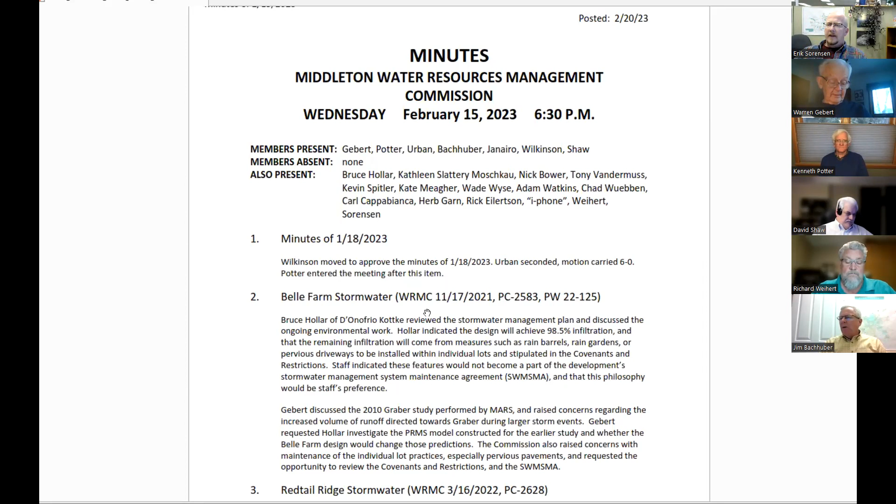So the first item of business then is a Middleton manure digester. Is that correct? It's called Middleton? Okay. Anyway. Yeah. You want to introduce it, Erik? I will. I think in January, the commission had asked for some more information about this digester. So I contacted Kyle Minks with Dane County Land and Water Resources. And he is here to make a presentation tailored just for us. Oh, great.

I did mistakenly say this is located in the town of Middleton. It's really the town of Springfield, I believe. Yep. Other than that, I think. Yeah, you're correct in that, Eric. We just refer to it as our Middleton digester when people are always asking, because it's the closest reference point for people around the state.

Do you want me to use the PDF version that I sent you, Eric, or is it easier for me to share my screen in the PowerPoint? It's up to you. If you want to share, you can, or I can flip slides for you. I'll share my screen if you're okay with that. No, I can get you in. Okay. I'm just slow. I know I sent you this presentation last week, and I say it's the newest and greatest because we just got the updated 2022 numbers for the digester. So I thought you all might be interested in that. You'll be the first to see it.

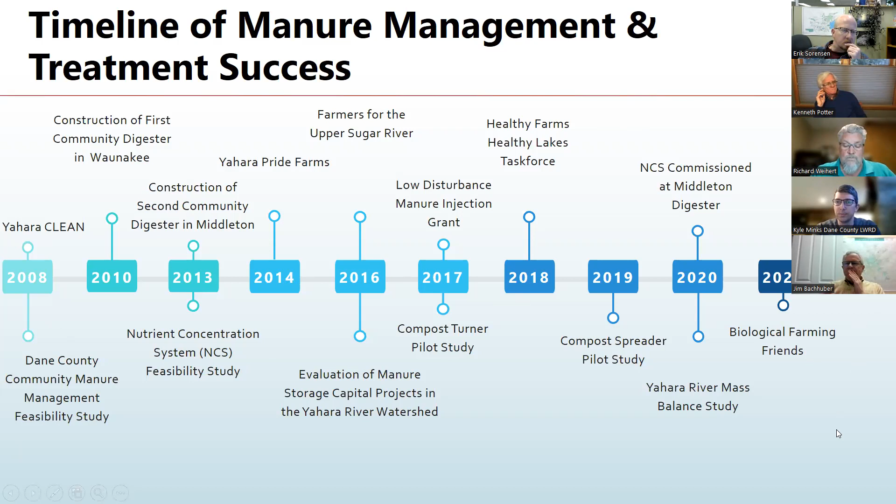So one thing that I want to point out at the beginning of the conversation, and most of you are probably aware of this, but there's a common misconception that anaerobic digesters remove phosphorus. The digesters themselves don't do anything for phosphorus, right? The principle of a digester is to collect either animal waste or food waste, put them in an anaerobic condition to generate methane or gas, in which case that gas could be captured and reused.

In addition, the solids that come out, or the digestate, the material that's left over from the gas generation, go through further processing through screw presses and filtration systems to really separate the nutrients out into different components. I'll talk a little bit more specifically about the Middleton site in a future slide. But I just want to lay the foundation that a lot of people, when they think digester, they think the digester removes phosphorus. And really it's all of these components at the facility that get us to that phosphorus removal and that water quality component that the county's interested in.

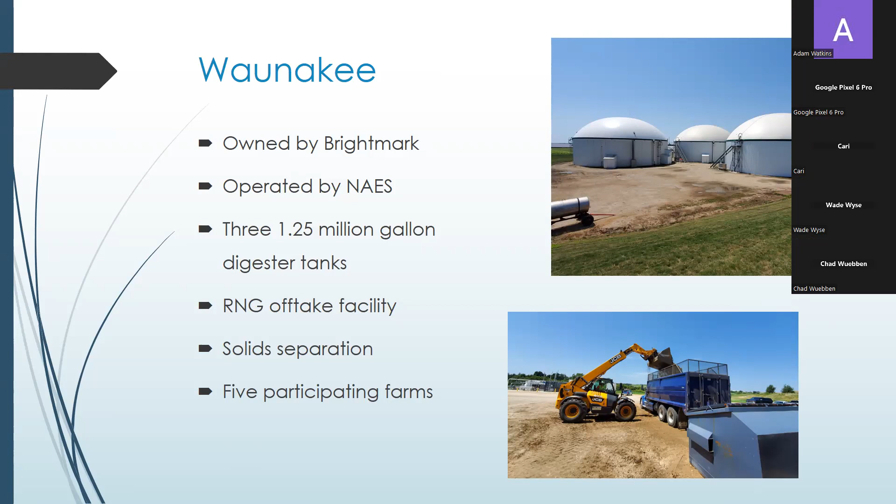And then they also have what we call an RNG offtake facility, which stands for renewable natural gas. That's basically the collection system on site that collects the gas from those 3 digester tanks, cleans it, and then compresses it to be transported on a semi-trailer to our landfill facility. They also have a solid separation system at this facility in which solids are removed that contain a majority of the phosphorus.

And currently we've got 5 participating farms in this facility. Originally, when the digester was built back in 2010, there were 3 participants. And in probably the past 2 years, they picked up 2 additional participants. This facility right now is pretty much at capacity. They don't have much, if any, more space to take on more manure.

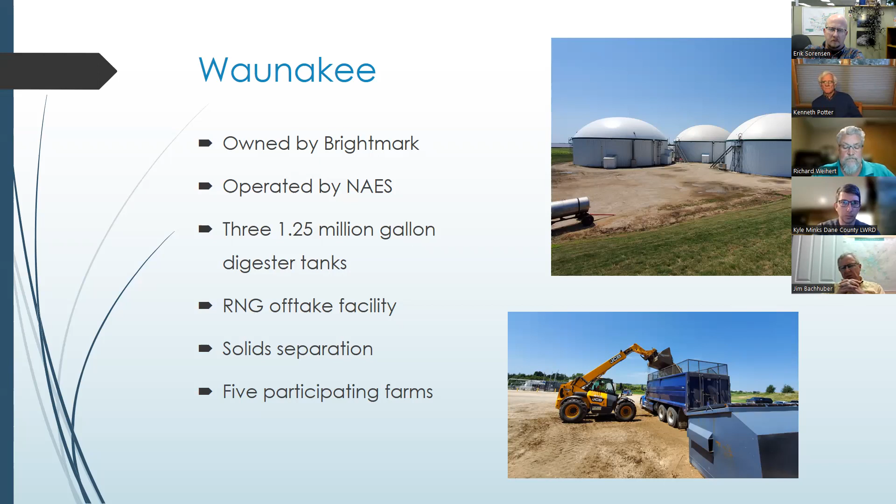They have similar solid separation equipment, in that they have a screw press and a centrifuge that is used to remove the solids from the manure. And then they also have 5 participating farms at this point, and are pretty much at capacity as well in their ability to add more manure.

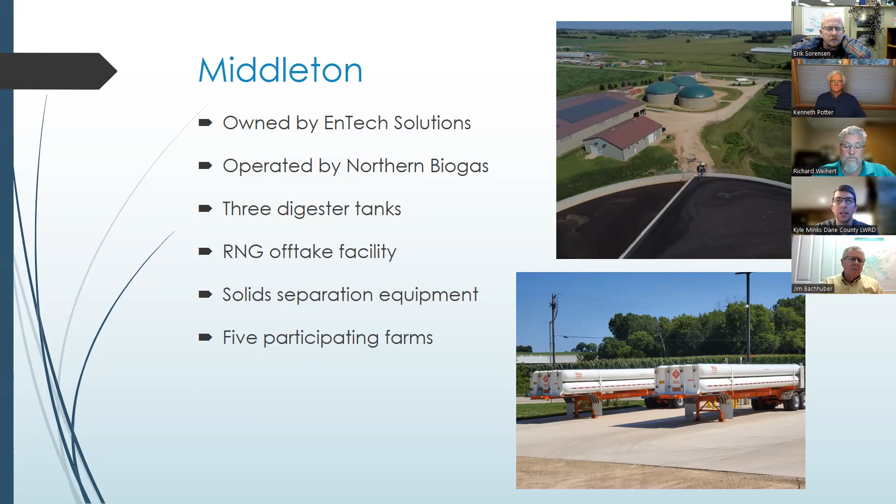What's kind of unique about the Middleton facility, in addition to what I listed on that slide, is it has these other add-on features that we learned in the first go around or wanted to try to see how that might improve operations. And that includes a 71,000 square foot solids building that you see on the right for the solids to help in the facilitation and composting. There's a compost turner in there that allows them to add other soil amendments or other nutrients and aid in that composting process. In addition to that, it also has a 15 million gallon storage lagoon on site for the storage of the centrate and the digestate that comes out of the digester.

Additional improvements that have happened within the past year and a half is that there's a complete solar microgrid out there, which is pretty unique, and we were very excited to see EnTech embark on. In essence, they are 100% carbon neutral. They put a solar grid on the back end of the meter, so that way they can generate from the solar panels all the energy they need on site. So if you drive by there, you'll see solar arrays on the sides of the hills, on top of the buildings, to generate the power needs for the equipment there.

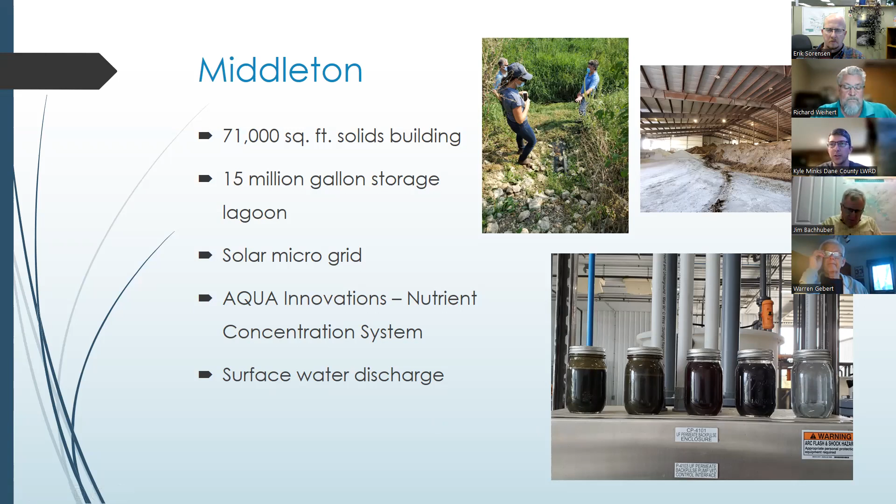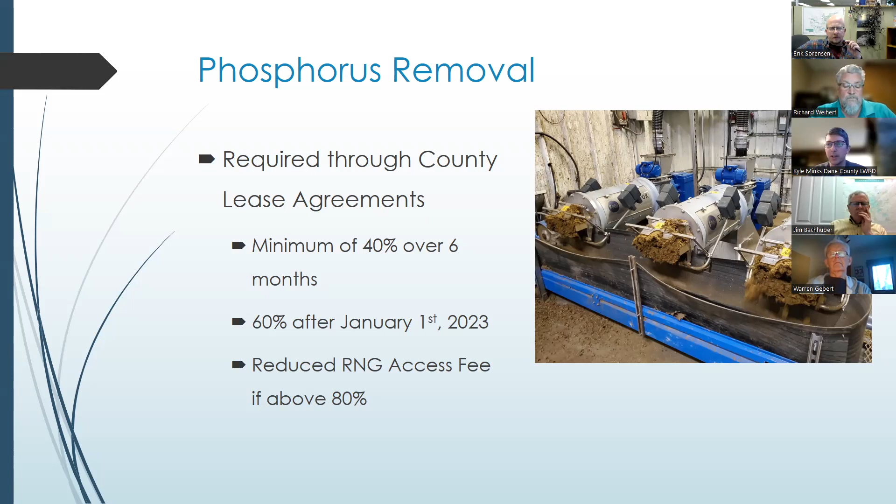In addition to that, we also built into some of the RNG agreements an incentive. We wanted to give them a reward for trying to remove more than 80% of the phosphorus that comes in. And so we've got in our agreements the ability to reduce, in essence, a tipping fee or a service fee that we charge for them to offtake their RNG that they generate and bring to our landfill if they're able to remove more than 80% of the phosphorus that comes in.

And then along with that, that's kind of the performance that we have for each of the different digester facilities. We also have built into our lease agreements the requirement for any participating farm to apply the centrate or the liquids that are remaining and even some of the solids according to an NRCS nutrient management plan on all the project fields. So the 5 farms that we have on both sites are abiding by these land spreading requirements.

What that in essence means is that the digester nutrients and manure applied is based on a soil test phosphorus and crop uptake needs with more restrictions than what the current 590 standard has. So really these farms are required to go to a higher level of performance than what the state performance standards require of them. And the goal of that is to try to draw down those phosphorus levels that are in the soil out there that these participating farms have.

We know that this part of the watershed has a lot of history of livestock agriculture, a lot of history of manure applications, and in essence, a legacy buildup of phosphorus exists on a lot of the soils that are out there. And so the farms that are participating in these projects, we're trying to get those to be reduced. And then again, all fields need to still meet that PI of 6 or less. And in addition to that, all the farms that are participating in the project are not allowed to apply manure or any of the digester materials on snow or frozen ground. That's an additional restriction.

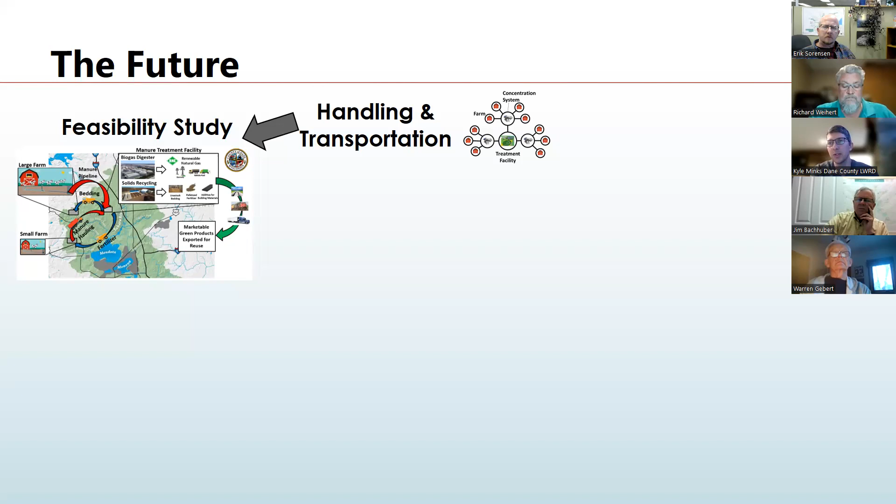Also looking at different ways of processing the components. There's been a lot of discussion on whether the nutrients that are coming on the back end should be in a liquid form or maybe a solids or pelletized form that's more like synthetic fertilizer, trying to build consistency in the nutrient concentrations in these materials to make what we call a designer, or a field specific nutrient recommendation. In essence, that's what we're shooting for with nutrient management plans. But can we replace synthetic fertilizers or commercial fertilizers with more of a farm generated or manure generated natural nutrient source?

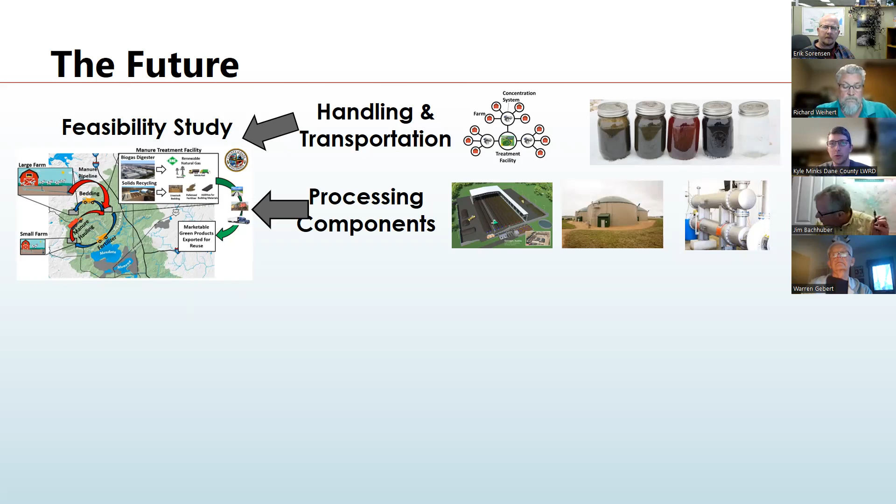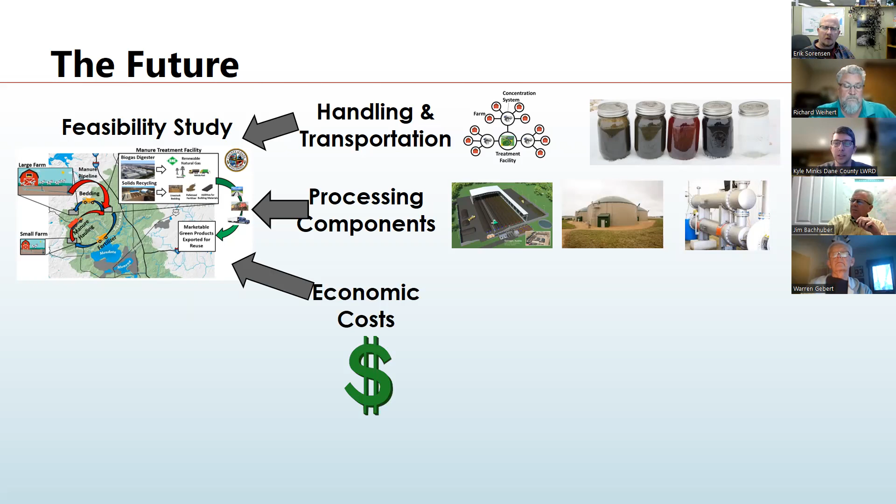And then we're also still trying to figure out the economics around that, because right now the composting markets really aren't there at the manure scale. And so we're trying to figure out how that might work and be feasible. Also looking at different market analyses and then what type of business structure might be most beneficial, whether that's individual farms, a co-op, privately owned, county owned. There's a lot of questions around just how you can make something like this work.

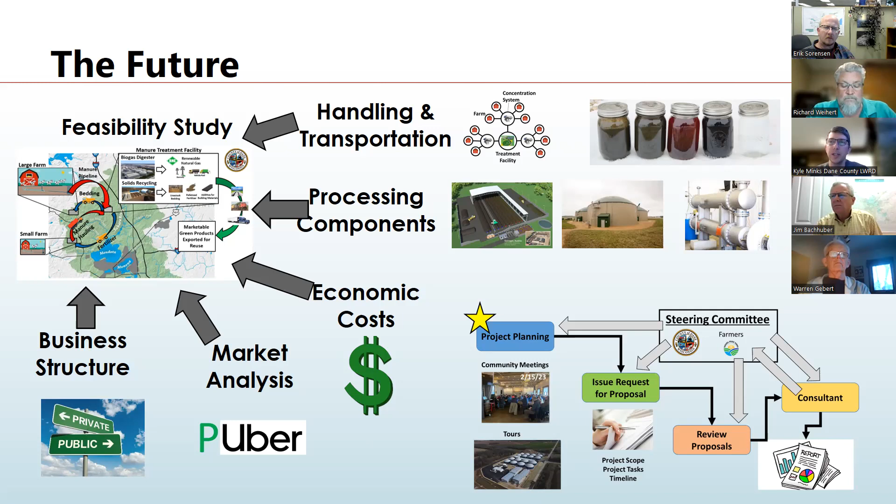So where we're at right now is we're in the project planning. We've had a few informational meetings. One was up in Waunakee. We also were at the Yahara Pride Farms Conference, if you're familiar with that farmer-led organization, to start to engage with agriculture on this topic to try to get their input and feedback. We're hoping to issue the RFP later this spring or early summer. And then also we'll probably be putting together technical teams to review some of those proposals and having further conversations with the ag community and the farmers out there on what they might want to see for the next iteration of community manure management.

And so with that, I'll stop there if there's any questions or if you'd like me to go back to any specific slides. Kyle, this is Warren. Where is the digester located in the watershed? Which watershed? Is it North Fork? Yes, North Fork of Pheasant Branch. Whereabouts is it located? Do you have a map showing where? Yeah, I don't have one here. It's right off of Schneider Road, just north of the airport.

Okay, so are all the farms participating in the watershed? So the farms that are participating in the Springfield facility, I got a list here because they just got those changed, is Ziegler Dairy, Blue Star Dairy, Henson Brothers Dairy, Endres Berryridge Farms, and Meyer Farms. And I know at the Waunakee facility, we have got Ripp's Dairy Valley, White Gold Dairy, Endres Dairy, Wagner Dairy, and Endres Berryridge Farms.

So do you have any idea of what percent of the watershed these farms comprise? Yeah, I think the last number that I had, Warren, we're always trying to find that number. I would say somewhere between 7%, probably maybe as much as 10. It's a hard number to nail down, but that's my estimate. Is that your estimate for the Yahara watershed or the North Fork? Yeah, that'd be my estimation for the Yahara, not for Pheasant Branch. Oh, okay. So Pheasant Branch might be more. Yes. Trying to think of the farms that are up there, Warren, I would guess it might be a little bit more.

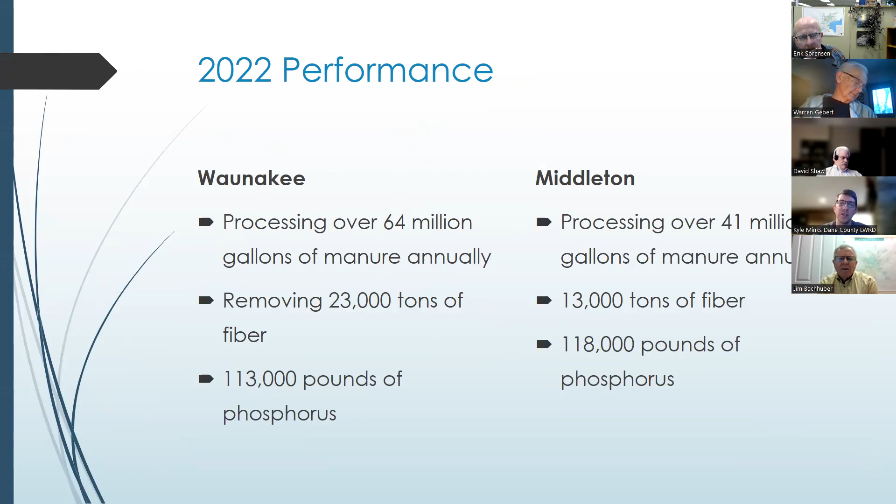I've got a couple questions. This is Jim. You showed a slide comparing the Waunakee facility to the Middleton one. You had more volume processed, more volume at Waunakee, but more phosphorus removal from the Middleton. Do you have an explanation for that? Yeah, good question, Jim. One of the things that we've noticed about the farms' manure going to the Middleton facility is it has a little bit higher phosphorus concentration than the manure going to the Waunakee facility. Part of that is most likely due to the manure flushing systems those farms have. I believe the Waunakee facility uses a little bit more water, so they're probably diluting their manure a bit compared to the Middleton facility. So the actual pounds, the load itself, is still more. Yep, and the other thing is we're getting a little higher performance out of the Middleton screw press and centrifuge than we're seeing at Wanakee at this point in time. Okay.

I got about 3 questions, but I don't want to dominate here. Let other people chime in here.

I have a question, and that is, how does the county pay for this, and are we getting a good return on our investment? Yeah, great question, Lisa. So both of these digesters are privately owned. So the investments that the county made would have been back during the construction of both facilities.

I think at that point in time, we received state funding, I think around $3 million for both of those digesters. The county has also invested, I want to say it's a little over $1 million for the nutrient concentration system as well. But otherwise, all of the operation, the maintenance has all been privately funded from the current owners of both of those facilities.

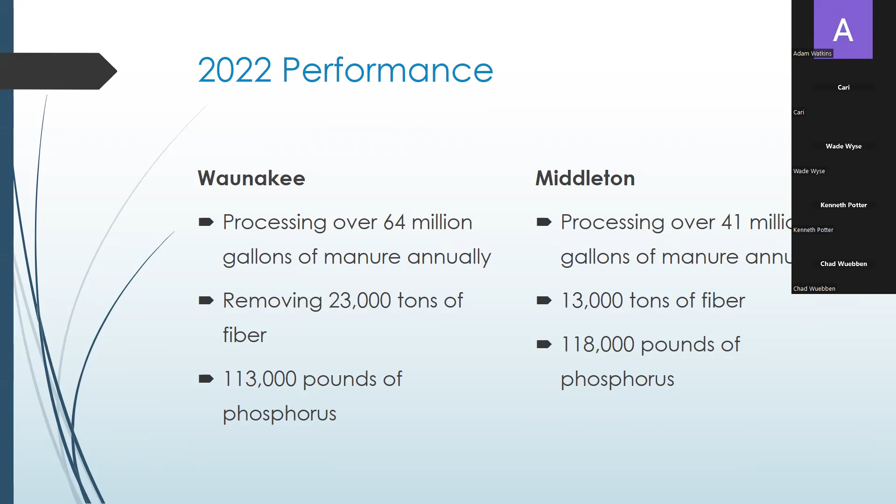We did it about 5 years ago for the Waunakee facility. And at that time, it was a little hard to conclude because soil samples are usually pulled once every 4 years for agronomic purposes. And so we didn't quite have a large enough sample size yet to see whether soil test levels were dropping.

We are in the process of doing a county-wide kind of soil analysis. I shouldn't say county, a Yahara River wide soil analysis. I just don't have that data available right now, Jim. Sorry.

Okay. This is Warren. As far as our loads at the North Fork Pheasant Branch, the trend is not decreasing, it's increasing, but that's because of the 2018, 2019 loads. If we remove those, I don't know what the trend would be. It's probably pretty level, maybe decreased.

I was going to guess on the other issue here, and Kyle, maybe you can help out. Are there more animal units in the watershed now than there were 15, 20 years ago? Yep, that's a good question, Jim. We certainly are seeing the ag trends in Dane County mirror very closely what we're seeing across the state and the nation.

I don't know if maybe it'll be a surprise to a few of you, but we're starting to see a lot of consolidation of livestock agriculture. It's not something we're only seeing in Dane County. It's what we're seeing across the state and the nation. There seems to be a consolidation of livestock on a certain number of farms.

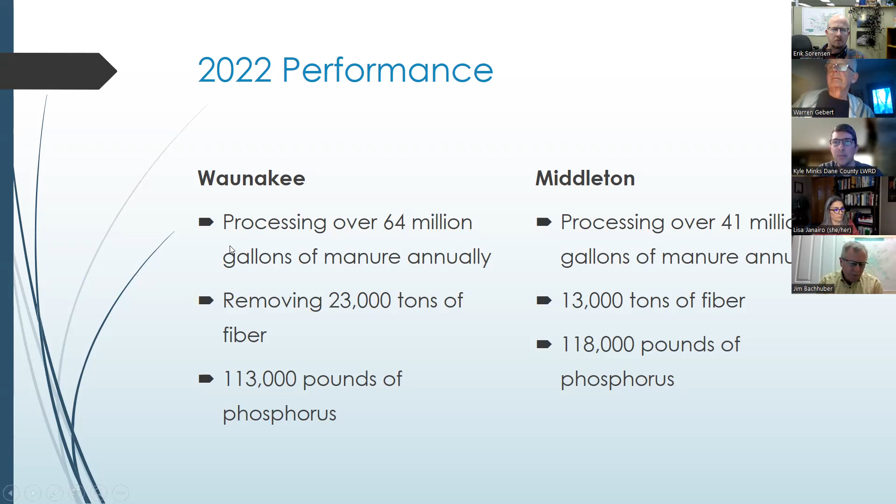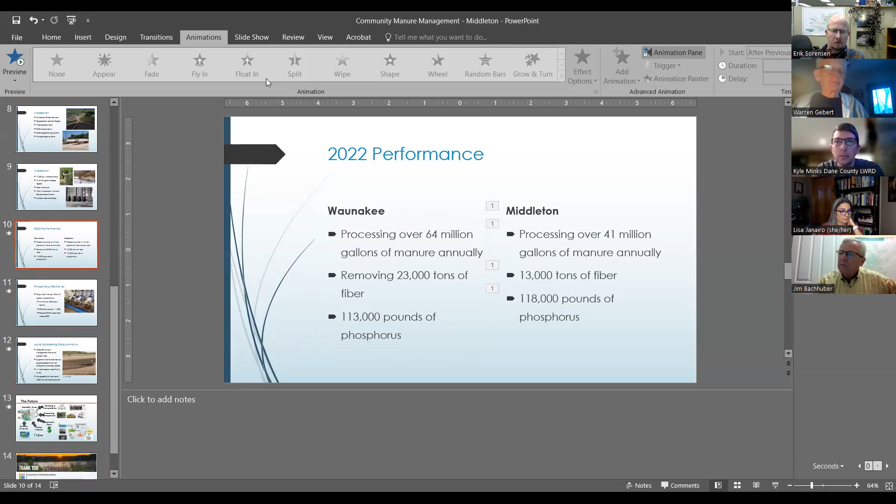Okay, well, thanks a lot, Kyle. That was very good. I appreciate it. Yeah, thanks for having me. Really appreciate it. If you do have follow-up questions too later on, don't hesitate to send me an email. I'll be happy to answer them. Okay, thank you. Thanks, Kyle. You bet.

Next item of business then is road salt and de-icing. I asked this be put on the agenda a couple of months ago. Basically, I saw an article in the State Journal about the salt problem in the Madison area. And I thought the issues they're facing, we're also facing. And we also contribute to the problem, and it affects the water resources in Middleton. So I put together these slides just as talking points to help our discussion.

So can you operate them, Eric? Yeah, I can. Okay. Next one.

So salt, as we all know, is used for ice control on streets, parking lots, sidewalks, for public safety and commercial and for personal mobility. And road salt is usually sodium chloride, which is highly soluble and moves easily through the stormwater systems and soils into the water bodies and streams. Excessive use of salt has increased the salinity of Lake Mendota and the groundwater aquifers. And studies have found that during snowmelt, concentrations can rise rapidly in streams to levels that are toxic to aquatic life. Next. And if you have any questions as I go through the slides, please bring them up.

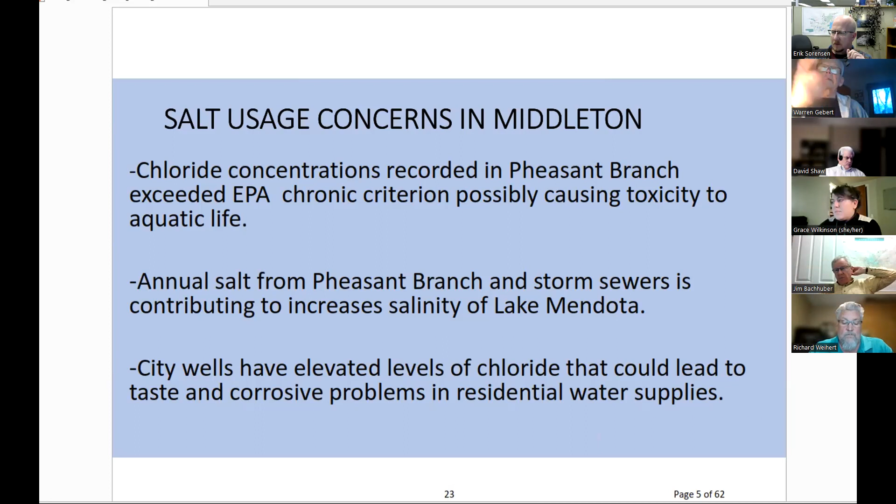Warren, are these the salt levels in Pheasant Branch? Is that from the USGS? Now I could go to the next slide, and this is a study that Herb and I put together back in 2012 that we measured chloride levels at our gaging station for about a 15-month period. And so the next slide will show those.

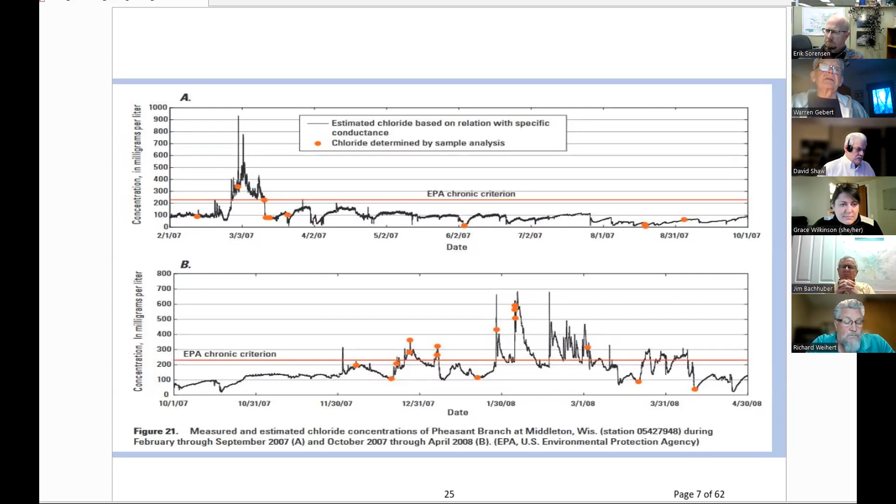This is a slide showing the toxicity levels for the period February of '07 through April of '08. And you could see the spikes in concentrations in milligrams per liter, and also the EPA chronic criteria. So you'll notice that back in March, we had large spikes. And then in '08, we had them in January through March. And that's our observed data we had. So that's how I come up with that idea. Next slide.

And this again shows the daily and monthly salt loads expressed as sodium chloride in Pheasant Branch during that period. And you can see what the loads are in tons. And the bar graph in the bottom, March and April have the largest loads. And then again in '08 it's March and April. And I was surprised at the April data.

That's not when snowmelt comes, but actually a lot of the higher loads or concentrations come not during runoff periods, but actually the melt after a snowmelt and a small light rainfall, where we have high levels of concentrations and not much dilution from heavy runoff. So basically, we've measured about 1,720 tons of salt during that 15-month period being delivered past the gaging station, going into the conservancy, and then into the lake.

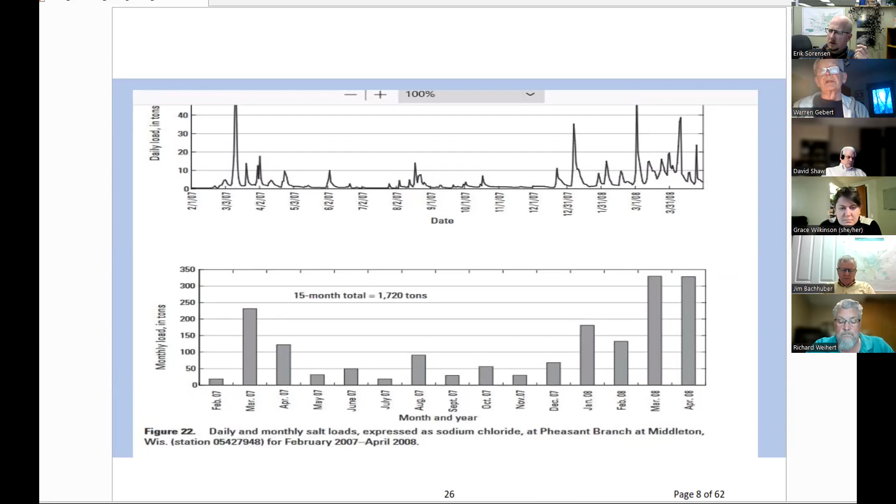Next slide. And this again is just a summary of the previous slide showing the amount of salt that runs off, or 1,700 tons during that period. Next slide.

And this is an excerpt from that report: peak concentrations of chloride during the winter usually occur during times of low flow when air temperatures warmed enough to melt snow and ice on the roads, or when a light rain was sufficient to wash salt into the storm sewers. However, overall melting or rainfall did not increase runoff enough to dilute the salt. An example of this situation occurred during February 17th to the 24th. 13 inches of snow fell on February 17th, initiating road salt applications.

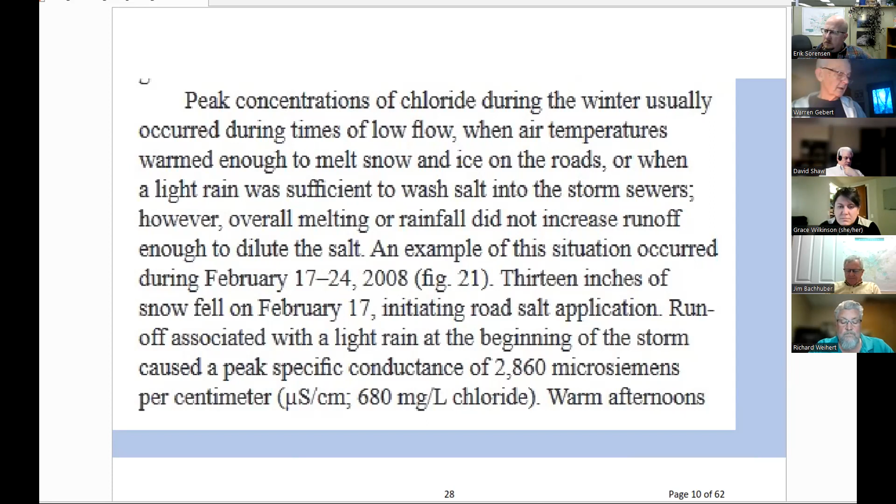Runoff associated with the light rain at the beginning of the storm caused a specific conductance of 2,860 microsiemens per centimeter. So essentially what we monitored was conductance, and then there's a conversion by measuring the chloride loads at a given time and then making a relationship between conductance and salt loads. So next slide, please.

So this is Middleton salt policy. I took an excerpt from that. Snow and ice control on roadways and public properties is an essential municipal service necessary for public safety and commercial and personal mobility. The city's goal is to keep the city's road network and municipal parking lots passable during and after periods of snow or ice accumulation at minimal cost. This can be accomplished by judicious use of mechanical and chemical means under the jurisdiction of the Public Works Department.

So essentially, Middleton salt policy for arterial and collector streets is to apply presently about 150 pounds per lane per mile. Has that been updated, Eric? Has that changed or not? My understanding is that that's the default rate, you know, for a default storm.

So that's the intent. Yeah. Okay, and it's applied to significant horizontal and vertical curves, most approaches to intersections and railroad crossings, bridges, bus routes, school zones, police, EMS, and fire station access, and low volume residential streets without grade problems will not routinely be salted. I live on South Avenue and it seems like we could salt it all the time, and most of the neighborhood streets around here seem to have salt application.

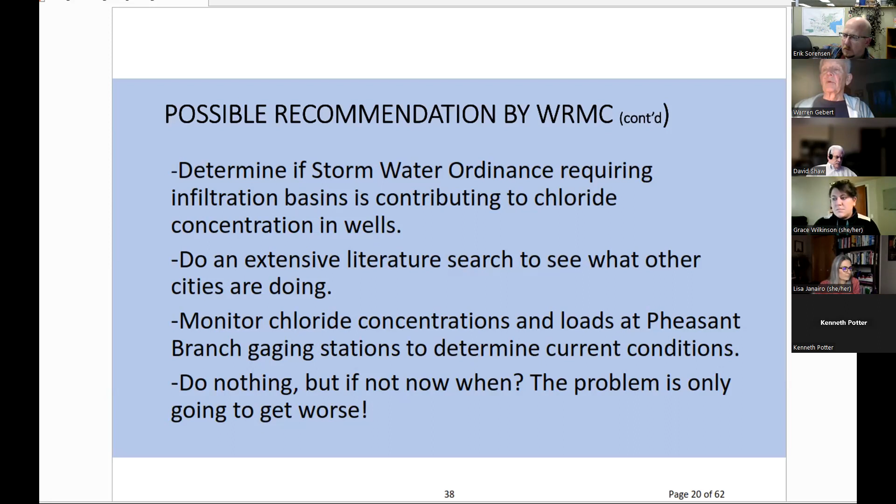Well, I think there may be a little misunderstanding. You know, this is the range. The way I understand it, there are two wells which are close to each other, just south of downtown here, up on the hill, south of like Capital Brewery, that are the high ones, and the rest of them are not experiencing these issues. But isn't that water distributed throughout the whole system once you pump? Aren't they mixed? To some extent, yeah. I think Strand has a citywide model of the water system that might be able to answer some of those questions. But I think the answer is it depends on who's using water and when. But to some extent, I'm sure those well supplies are localized.

Yeah, I'd like to know if that level, that 170, is that a one-time sample? Is that an average over a year, or just the highest number? It's been ticking up over the records that I found, which are few, but over the last 20 years, I want to say, it was higher than the others in that first test that I saw, and then it's been creeping up. And there is a trend up. It's not an anomaly. I believe it. What surprises me is the location of those wells. Those wells go down into the Mount Simon sandstone, and above the Mount Simon sandstone, there's a confining unit, the shale. And so I'm surprised; that confining unit should stop any downward movement of salt, I thought. But I guess I'm wrong.

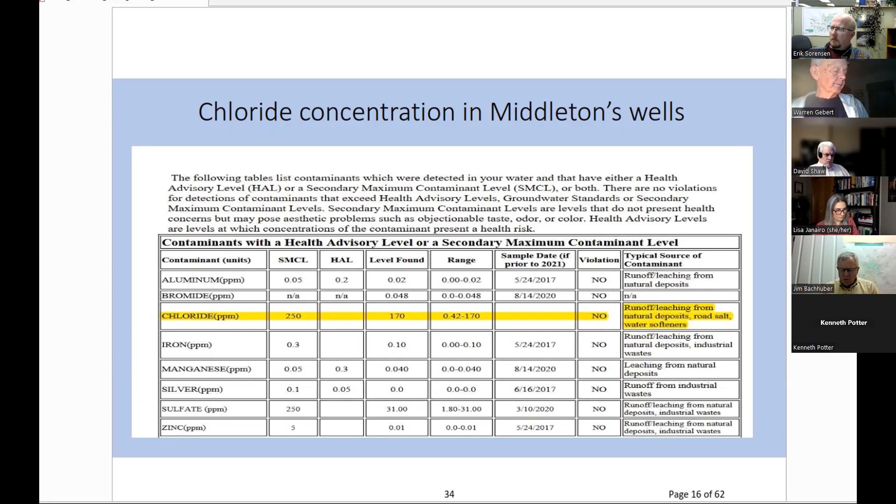Next item of business then is appointment of a member to the Conservancy Land Commission. So you want to talk about that, Erik? Yeah, briefly. If you remember when we appointed people to other committees in June, we kind of cajoled Julie Urban into doing it, and she was hopeful that she would only serve half a term. So I think that time has come, and Grace has already been involved in this conversation, and I don't want to speak for anybody here. It's not too much of a time robber, as we haven't had many meetings lately.

Oh, at CLC. Yeah, I was going to ask about that because I looked to see when they're scheduled for next week, because there's a candidate forum that many of us maybe want to see. But there were literally no meetings listed for this year. Has it met at all? I think the last one was like October or September or something. So no. I'm told there's nothing to talk about. Well, then that makes it easy. Yeah, it does.

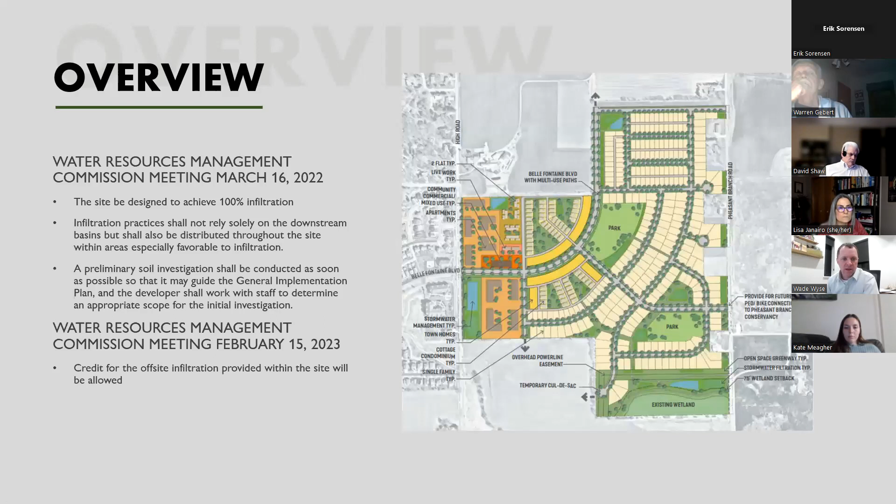And on the south side, the big change is that we moved the actual facility from its previous location, a concern for mottling soils and redox conditions and groundwater, to a location that has resulted in the loss of developable space, but we feel it's a better location for infiltration. The other main highlight that I'd like to point out is on the north end of the project. The stormwater basin in that location has grown in size as we dial in this design. So I think with that, I'll turn it over to Kate to go over some of the technical parts of compliance.

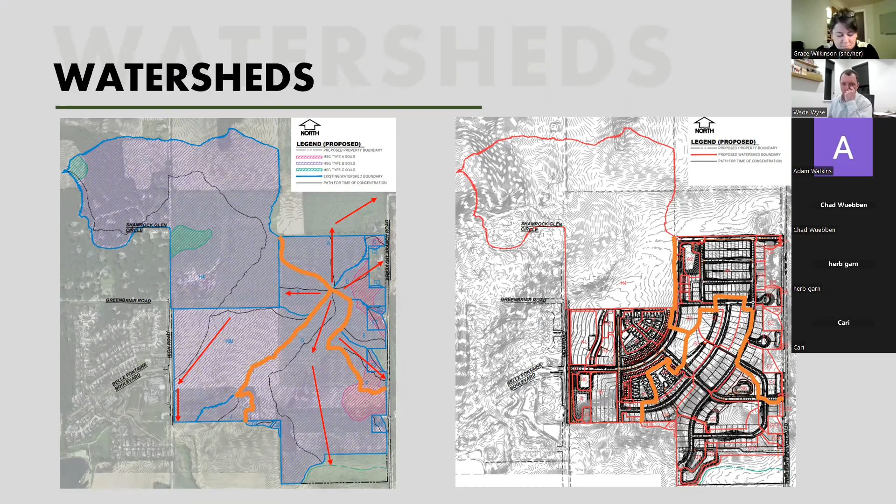Yeah, so back when that was done, some of us would like to have made the stiffer requirements, but we were resisted by the state government. The legislature basically prohibited us to go to any higher standards. So if you're concerned about that, you really have to look at the legislature on it. But we could use a different year in our ordinance. No, you couldn't. I think so. No, I guarantee you that you will be stopped on that.

Yeah, Dane County tried to raise the bar, and developers got a hold of their representatives in the state, and law was passed. The retribution was quick too. I remember it very well. Yeah. Well, USGS did the study for DNR, and I think DNR asked USGS to look at it again a couple of years ago, and they did. And I think they came up with more recent ones weren't all that much different.

So one last question, and then we'll go back to the presentation. But on this subject, we can't require them to meet a different standard, a different year, but can we require more than 100% infiltration or maintaining more than 100% on site? The requirement is 90%. Right. And when they came before us with, I'll call it a concept plan, a year ago, this commission recommended that 100%.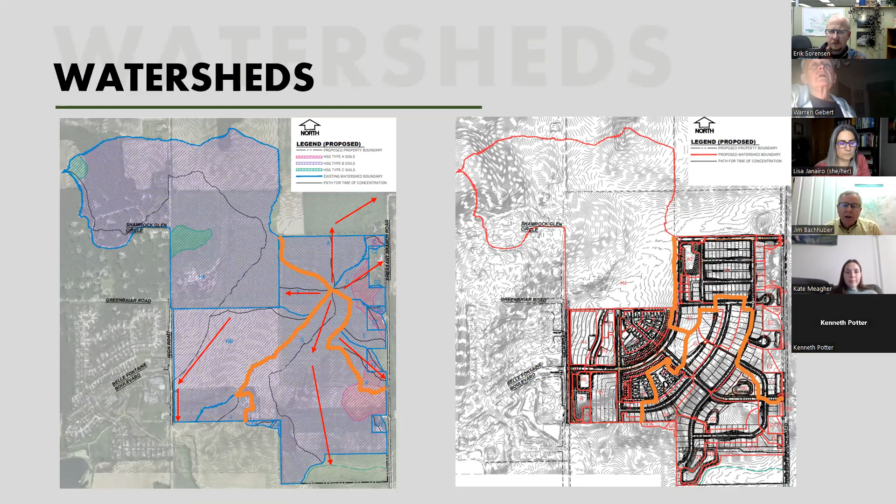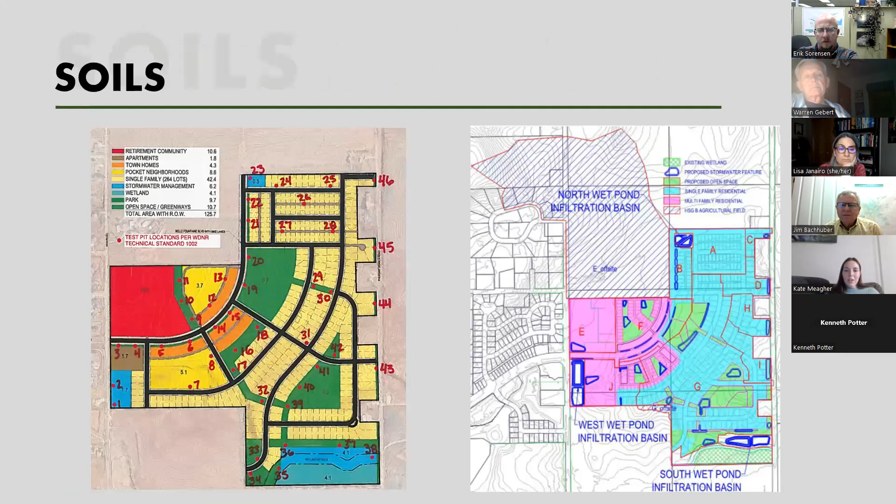So another part of that initial meeting was getting preliminary soil investigations for the site. So that was completed, and the preliminary stormwater plan was using those test pits. However, there were some concerns about the infiltration rates for the basins in the southeast and the southwest corners of the site, given the test pits. So as Wade talked about earlier, we did get some additional test pits, and we moved the southeast one. So this is the southeast original plan for the infiltration basin, and the test pits in those areas showed higher groundwater and moist soils and redox features.

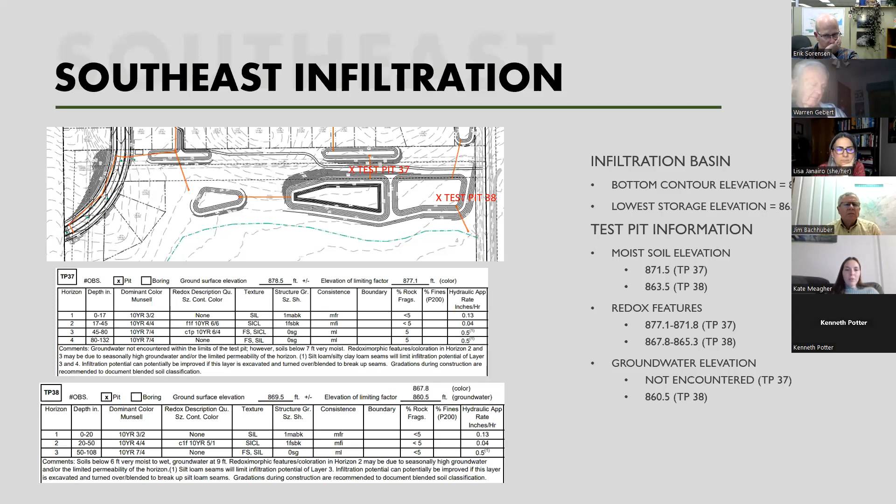So what we did was we removed those developable lots to the west and moved the infiltration facility over there, and we raised the basin so that it was out of the groundwater and moist soils, so that it had a better chance of infiltration. Kate? Yep. Question from Jim. So on this graphic here, I was going to ask you this on some other slides. The land we see to the east of those proposed basins and down to your south boundary has a channel running through it. That's basically going to be left undeveloped. Is that the proposal? Yep.

It'll be a wetland. Yep. So this area below this green line is all wetland. So everything below there is not going to be developed, and then this area above that as well. There's going to be some paths, as far as my understanding. But unless Wade wants to jump in. I think the key here is the south is limited by the wetland delineation, and you can see the easement line to the north where ATC is. So right now, we don't have a specific plan. We may use that as an amenity space as part of our SIP, but right now it is not planned for development. Thank you.

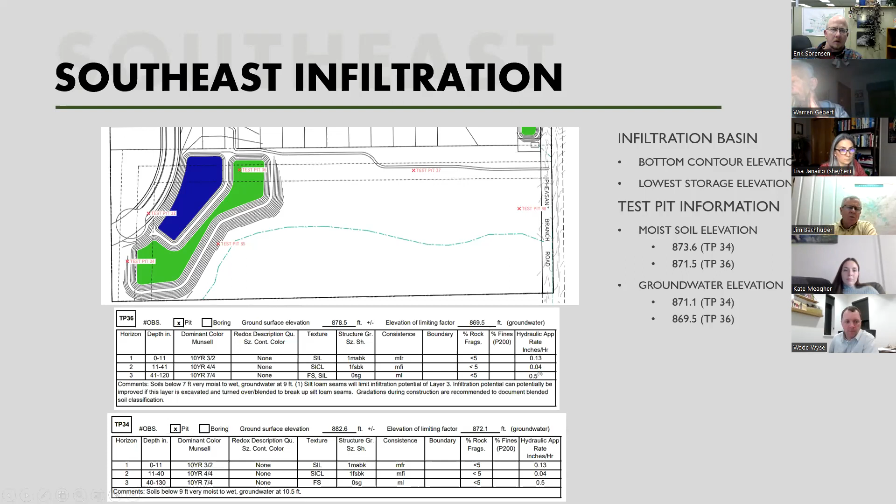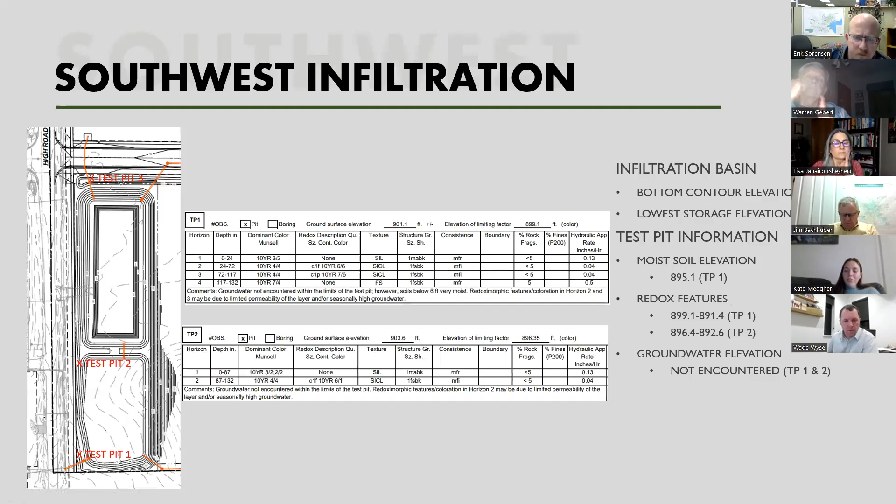And then a similar issue with the test pits in the initial infiltration facility in the southwest. So this is along High Road in the southwest of the site. The test pits here were showing no groundwater, but just redox and moist soils. And so there were concerns about the actual potential for infiltration in these areas. So we took additional test pits and also moved the basins to the east.

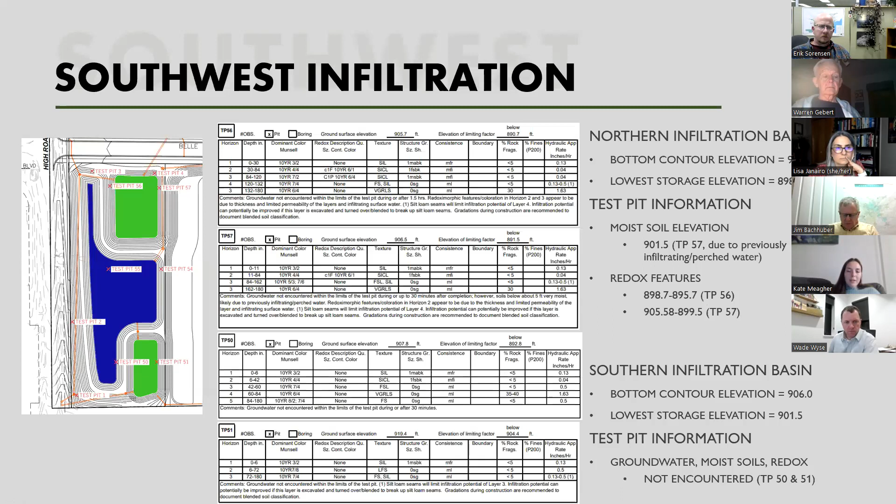And the test pits in these areas showed, in this south one, there was no groundwater or moist soils. And in this north one, we did talk with the geotechnical engineer and there were moist soils, but given how deep the test pits were and there was no indication of groundwater, it's presumed that it's just from infiltrating or perched water, so it doesn't actually impact the infiltration potential of that facility. So yeah, if you guys have any other questions, let me know.

Yeah, and I'll just close. In closing, I think from our perspective, this will be kind of our third trip to Water Resources as part of this development with the team. So if there was anything we could lobby for, we're hoping to continue to push this forward, move the project ahead, and work with Erik and staff to finalize this report. But we're hoping that we provided sufficient data for you to hopefully make a motion to kick us into that final level for us to get this through. Thanks, everyone.

Okay, thank you. One question I have is for the discharge from these ponds and the stormwater conveyance. They're going to go into that drainage way that runs in the bottom of the development across Pheasant Branch Road into the Conservancy. Is that where the discharge point's going to be? Yep. Is that extra water that was going to go down there, is that conveyance going to be able to handle the increased flow, and do you have a responsibility for improving that to handle the flow?

So for the 1 to 200 year events, there's no peak rate additional flow. It's just for those larger events, there might be volume, but the rate of it is not going to be increased. So there shouldn't be concerns up to the 200 year event. I think the question is perhaps creating a concentrated flow where before there was none. Yeah, I think that's something that we will look into a little bit more.

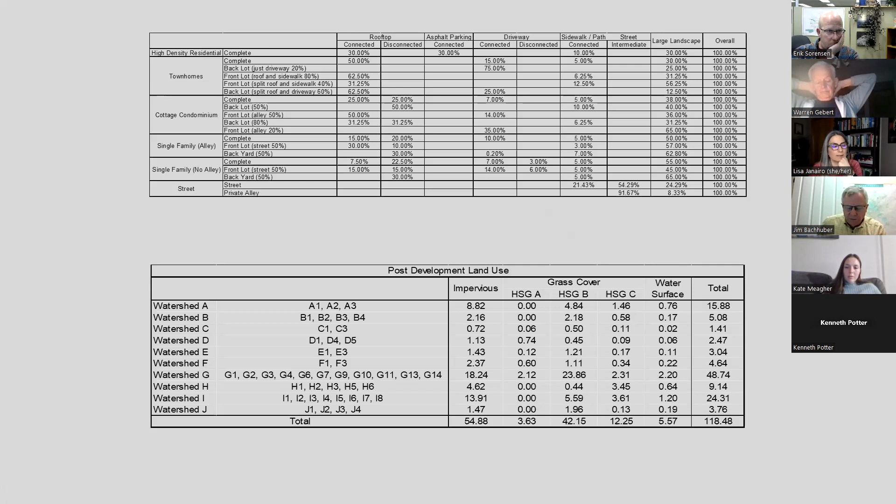Okay, are there any more questions? I have a question. One of the recommendations back in 2022 is not to rely solely on the downstream basins. Can you describe how you're achieving that? I see a variety of different infiltration basins throughout the development. Is that how you're following through on the commission's recommendation, or are there other things?

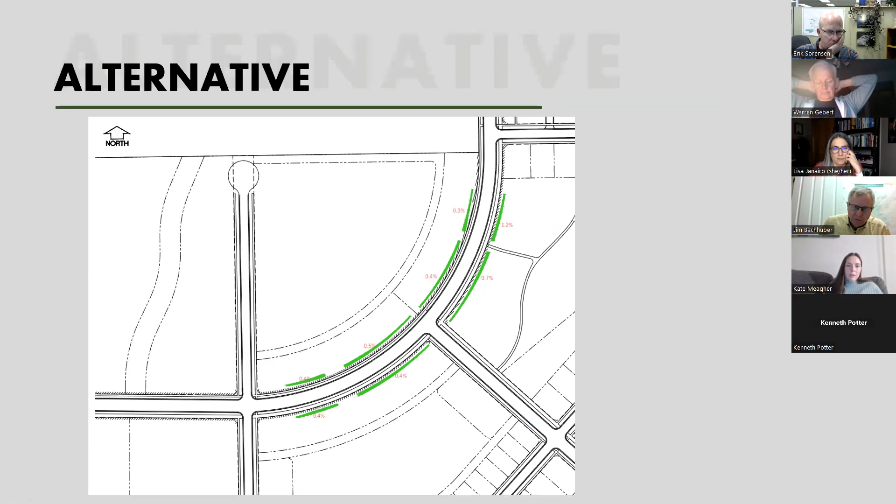I know in Bell Farm they talked about permeable pavement or green roofs or rain barrels. So are those part of your plan, quote unquote, or are those other ways that you can help get to a little more than the 100% that the commission's concerned about?

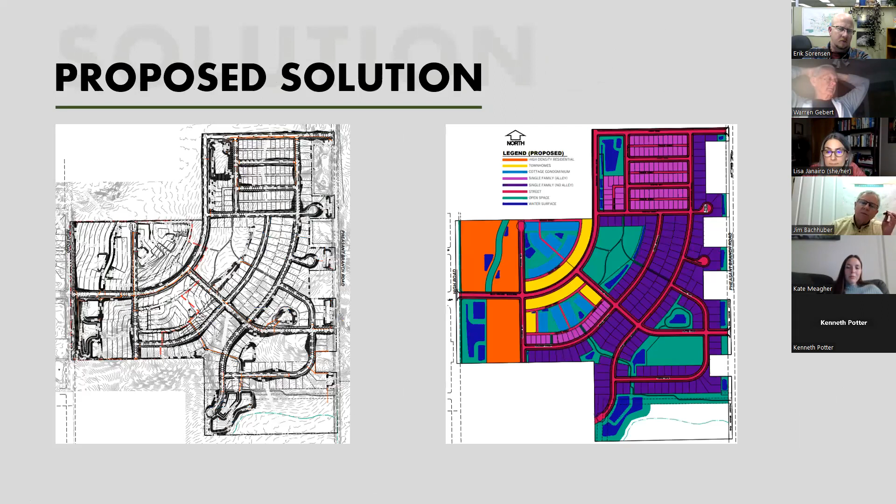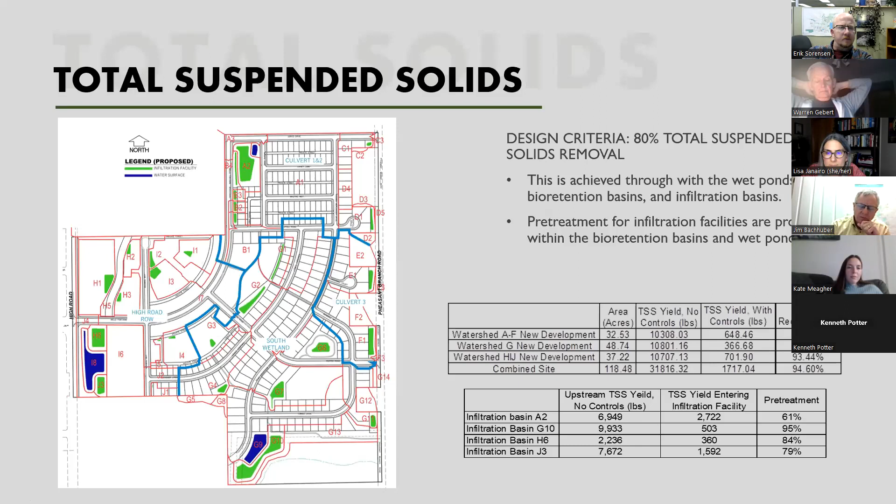This site is mostly using, to help meet that infiltration rate, local bioretention basins within individual watersheds to spread that out across the site, as well as deep tilling at certain areas to increase infiltration within the soils. So these open space areas that are going to be compacted will be deep tilled, as well as the single family, the purple ones, and the cottage condos, the blue ones. We're going to have a soil mitigation plan. But mostly infiltration will occur within these bioretention basins spread out across the site.

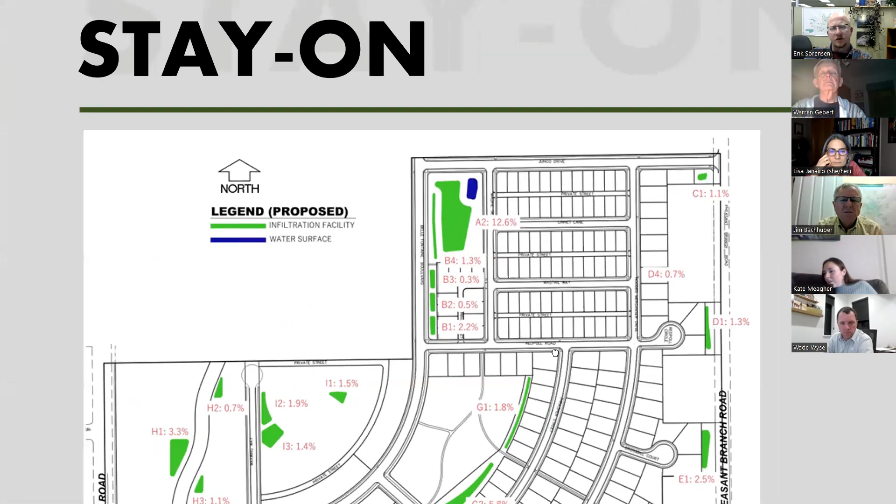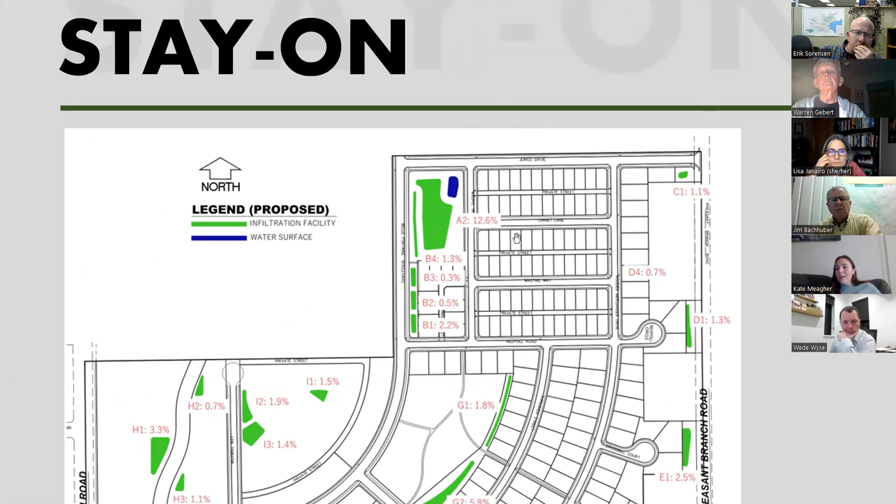Okay. Can you zoom in on this plan that's showing percentages? Can you do a virtual walkthrough of which component is getting how much? A2 says 12.6%. That's 12.6% of the 100 for the whole site, right? Yes, of the volume stay-on within the site, 12.6% is happening in this watershed. That includes the green areas, like the grass, and the infiltration occurring within the facility.

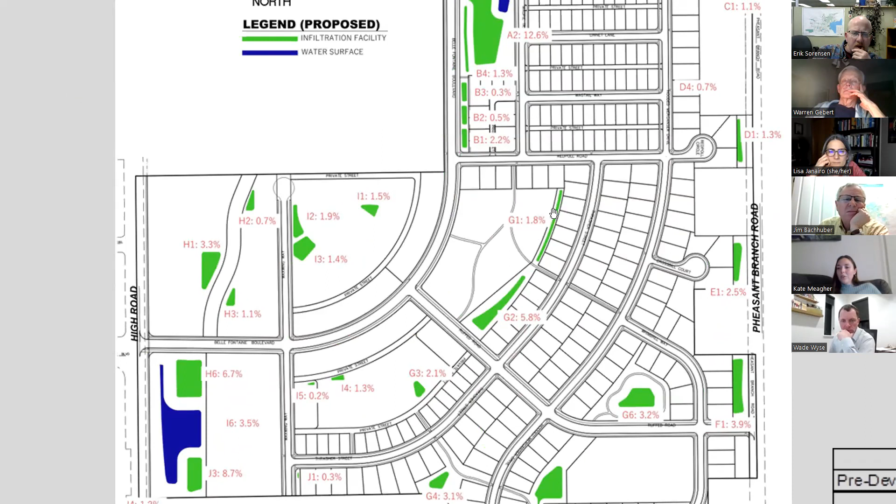Okay. So in these open green space areas, this 1.8% is stay-on within this watershed, the back of these lots and this green space. 1.8% of the whole site's stay-on is within this watershed. And the ponds at the south end. Are we adding up to 100 here? It seems visually a little shy. When I added them earlier, they did add up to 100. Okay. So I did double check that.

Members of the commission, this is the one recommendation I asked for: do you feel that the practices have been distributed effectively? This is the first time I've seen this data, but it's something I asked them to prepare to show you.

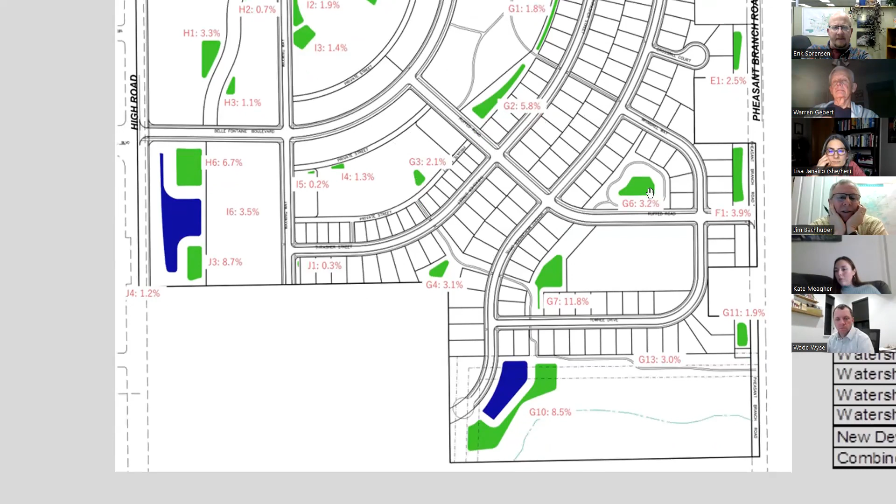Yeah, I don't know how to answer that, Erik. I mean, given the layout, the streets, the lots, everything else, how do you? You got to look at the calcs. Yeah. Well, if you want to defer until we have more time to review. I think that makes sense. Let you review it first, Erik, and come back to us.

I had a question about, I think it was the Friends of Pheasant Branch had submitted comments and they were really advocating for low impact development. And I think one of the, I may be mistaken, I see Herb Garn is on, so maybe he remembers, but I think one of the suggestions was to do something like sidewalks only on one side of the street to increase the amount of pervious surfaces. Is that considered in here? It's hard to tell just from this image.

I think as far as impervious surfaces of that nature for the model itself, the sidewalks are planned for each side of the street, so that we accomplish the goals of the stormwater with the most impervious that it could be. I think that is noteworthy and something we can certainly look into further, talk to the developer and dial in at SIP level for sure. I've got a feeling you're going to bump up against some zoning issues if you start doing some of those practices. It's going to take some zoning changes, or variances. Well, we'll see what the new zoning code looks like. I'd be all in favor of that.

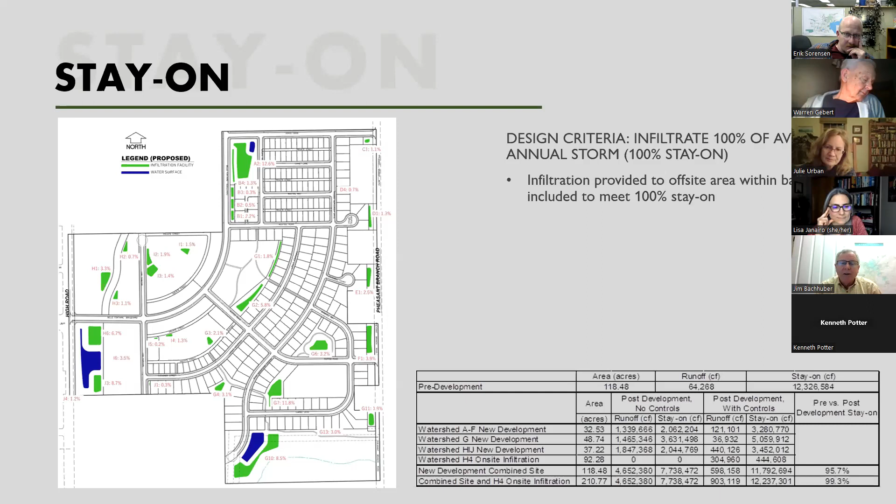Okay, so any more discussion, Erik, or are you going to review it and come back next time? Yeah, I think we need to. Do you need a motion on that? The motion is we're not going to, despite what I know the presenters would like to see, agree in concept and just have Erik work out the details with the county. But that's not what we're doing. No, we're asking Erik to come back and fill us in on his comments. Right. Right.

Well, I have one more question. Is this going to be phased in over a 10-year period? Is that right? Right now, there's 4 or 5 different phases, and the time period is just market driven, basically. So each phase will meet the requirements then? Yeah, so the first phase and the focus of our final plat will be kind of that westerly 40 acres.

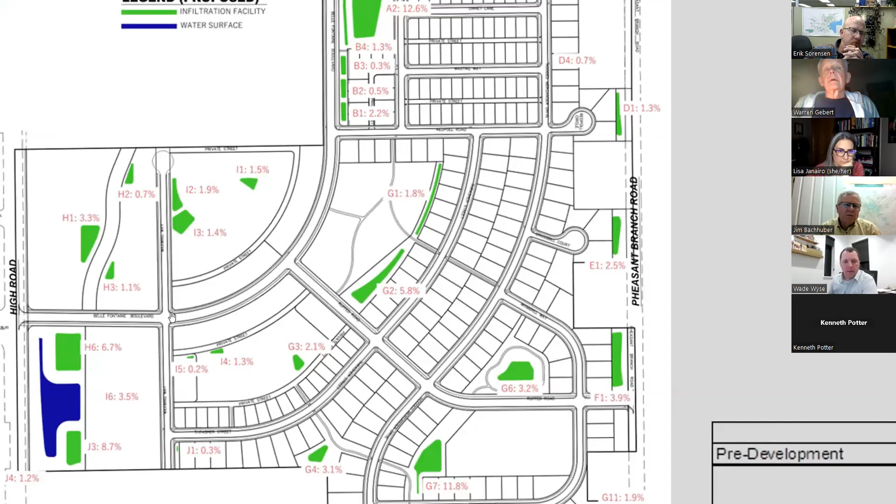Yeah. And yes, each phase will be compliant. Okay. Okay, so I guess we don't need anything then, Erik, right? No, I think somebody should make a motion to not accept my recommendation. Or I guess I didn't make a recommendation. I asked you to. Getting a little late here. Yeah, so we're coming back next month. I would move that we consider a recommendation from Erik at our April meeting. Second. Any more discussion on that? If not, all in favor? Aye. Aye. Aye. Okay, the motion's carried. Okay, thanks for the presentation. Okay.

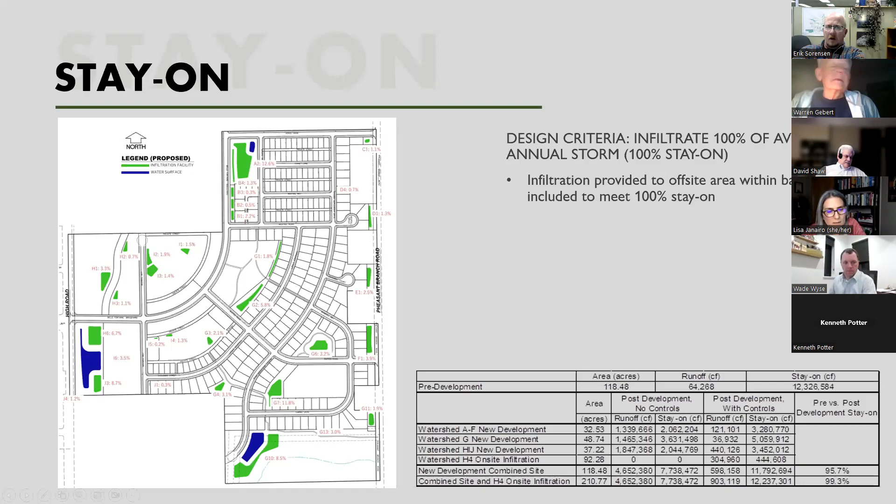The last item of business then is any suggestions for our next meeting? And I guess we already have a couple with road salt and then Erik coming back with the red tail recommendation. One thing I thought of, Erik, and I'm working on the summary of water quality and flow data for 2022. And so if we have time, I'll make a presentation on that.

Okay. And also, can we have a status sometime, a brief discussion of where we stand on Pheasant Branch as far as what they're doing on bridges and other restoration work from the 2018 flood? Is that ongoing now? The stream bank restoration is done. I think they'll have to come back in the spring and do some punch list items. The bridges, I can easily summarize that for you next month. Or else wait till the spring and maybe show a couple pictures of the restoration work that took place.

Sounds good. Yeah, I could compile that too. I mean, pictures from the fall, but if you want to wait. Yeah, well, so most of the work was done in the fall then. If you already had pictures, that'd be great. The stream bank, it was bid in 3 different contracts, Warren. 2 of them were for stream bank work, and those both got finished just barely before the end of the year. And maybe in late November, the contractor who's redoing the bridges and will eventually repave the trails came in behind that first contractor and started working. Mark Wegner sends out updates periodically, so I can summarize that relatively easily.